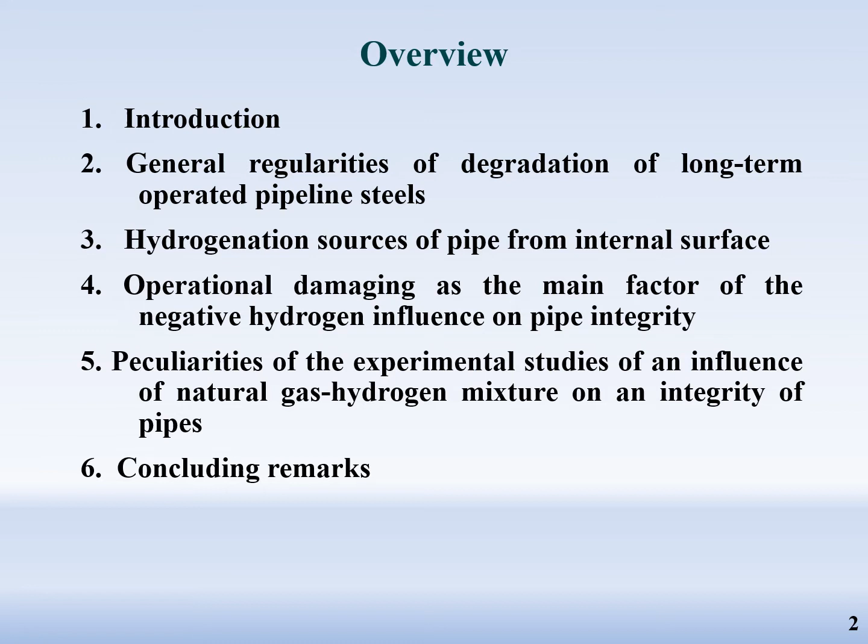Plan of the presentation: Introduction, general regularities of degradation of long-term operated pipeline steels, hydrogenation sources of pipe from internal surface, operational damaging as the main factor of the negative hydrogen influence on pipe integrity, peculiarities of the experimental studies of the influence of natural gas hydrogen mixture on an integrity of pipes, and concluding remarks.

Introduction. The new trend is now to use hydrogen as fuel in industry, and it causes some challenges in different aspects, namely hydrogen transportation. Hydrogen transportation is a cornerstone for setting up a hydrogen-based economy. Using the existing natural gas pipeline network for hydrogen transportation could be a way to match hydrogen economy needs and today's possibilities.

As you can see from this data, some hydrogen pipelines exist, such as networks owned by Air Liquide in the USA and Northern Europe. However, there are currently no large and widespread national hydrogen grids, and building them would require huge investments that can only be motivated by large hydrogen demand. So, supplying hydrogen by blending it with natural gas using existing natural gas infrastructure could be considered.

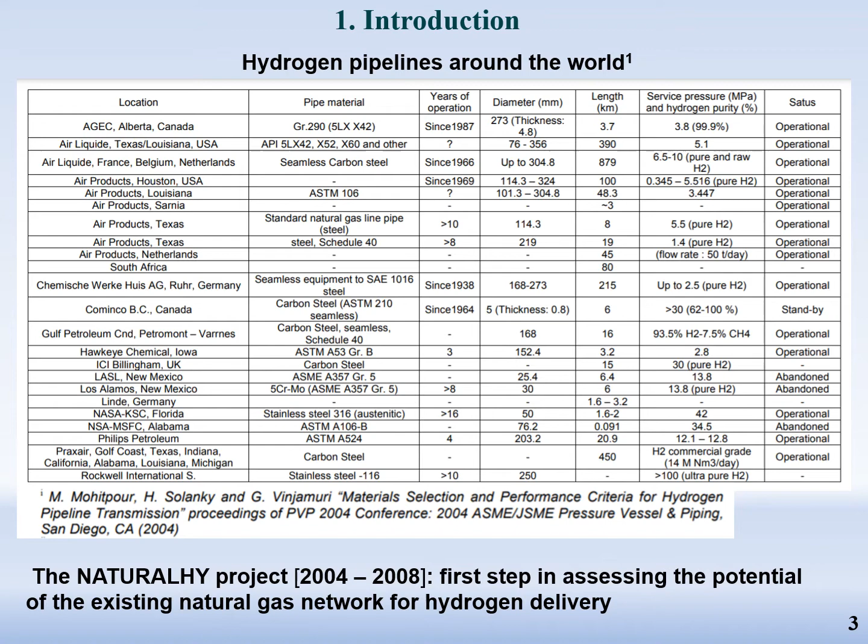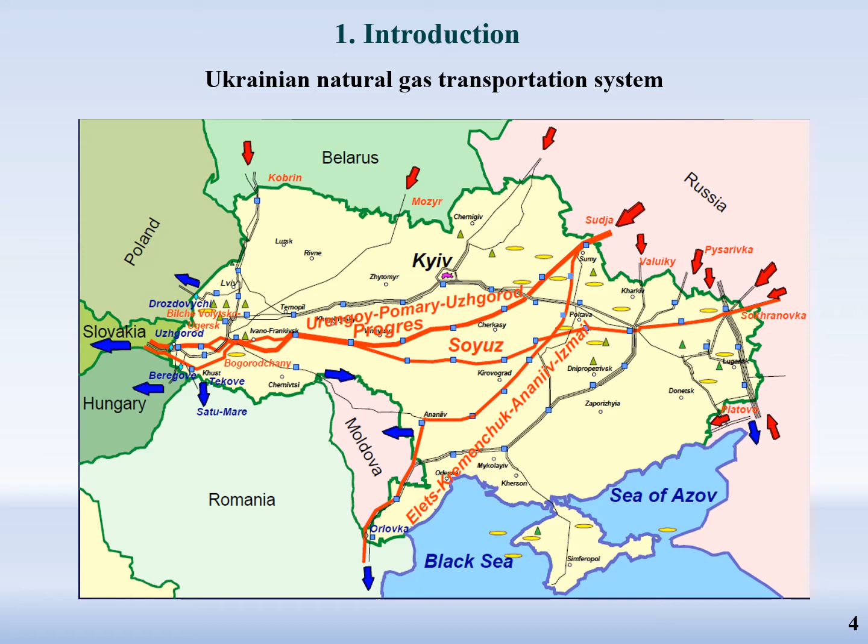The NaturalHy project is the first step in assessing the potential of the existing natural gas network for hydrogen delivery. Ukraine has an extended network of natural gas transit pipelines that could be used for supplying hydrogen as well. However, during long-term service, pipeline steels can degrade. A significant decrease of mechanical properties of operated steels, mostly brittle fracture resistance, can finally cause structure failure.

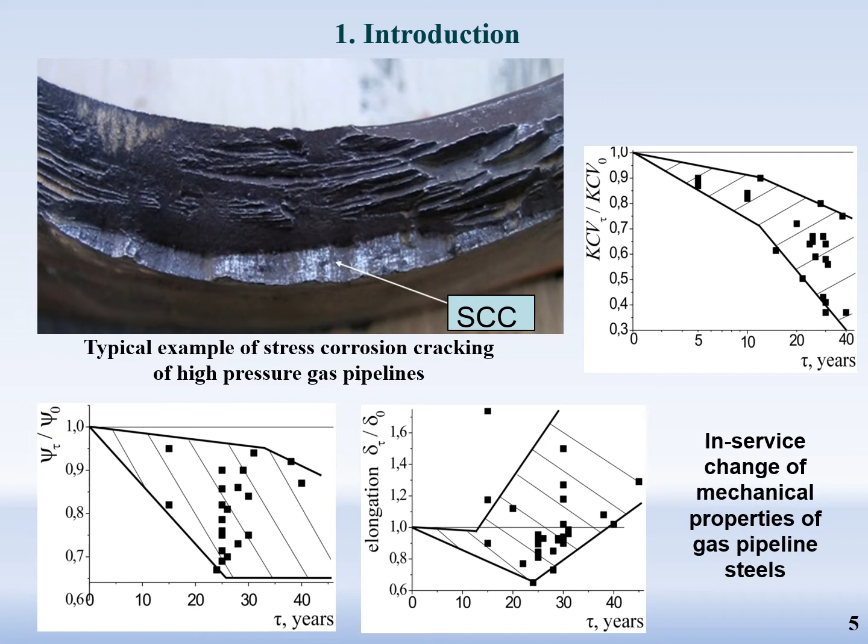Embrittlement. Deterioration of mechanical and corrosion properties is often the result of in-service degradation. Based on our previous results, we can distinguish two stages of in-service degradation of low carbon and low alloy structural steels. Stage 1, deformation aging, and stage 2, in-bulk material damage accumulation, or so-called dissipated damaging. It is well known that under strain aging, the strength and hardness increase, and plasticity and resistance to brittle fracture decrease.

However, this tendency of mechanical properties changes could be violated if the metal undergoes in-bulk multiple damaging during operation. In such circumstances, strength and hardness of the damaged materials decrease, but elongation increases. Further operation of the degraded steel leads to additional decrease in reduction in area and characteristics of brittle fracture resistance.

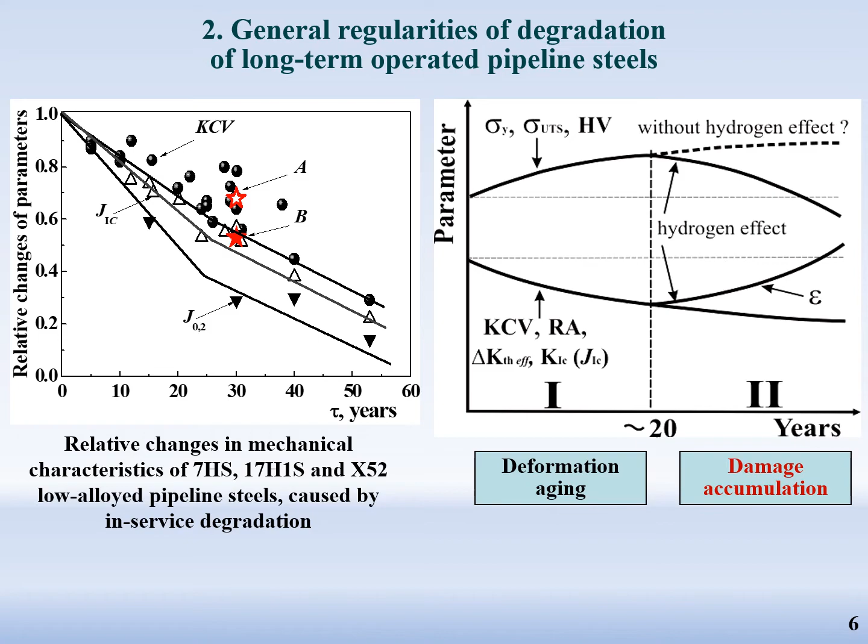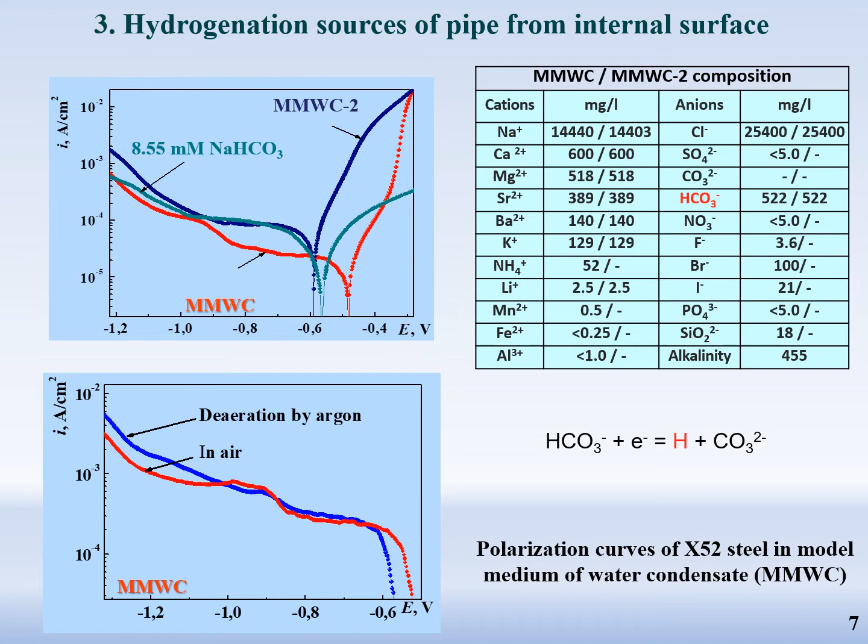Our preliminary study showed that the model medium of water condensate on the internal surface of gas pipelines has served as a source of hydrogen due to electrochemical corrosion. The same situation should be also in the case of gas-hydrogen mixture transportation. Then, hydrogen in atomic state, evolved as a result of electrochemical reaction and molecular hydrogen dissociation as well, can be absorbed by pipe metal in atomic state, which can migrate via the pipe wall.

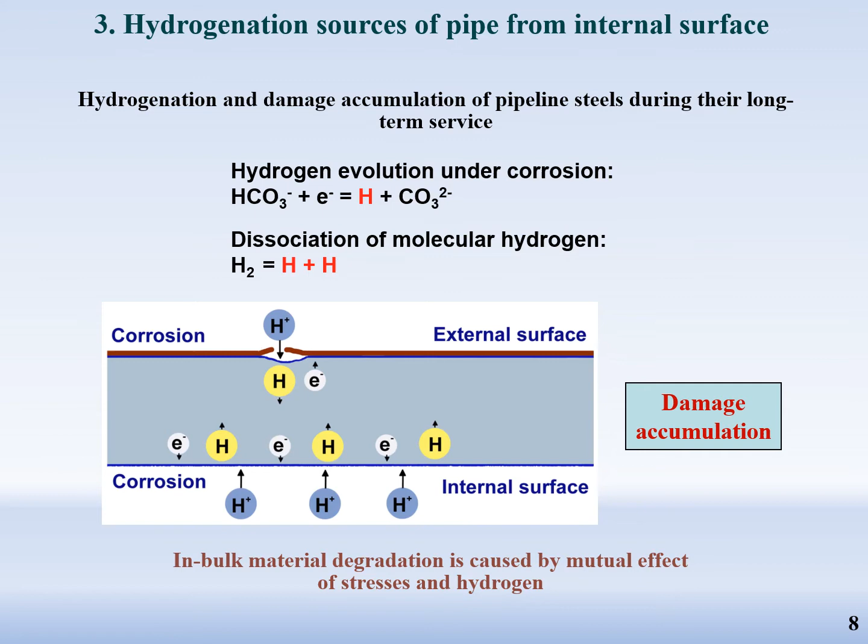On the other hand, operational damage serves as the main factor of the negative hydrogen influence on pipe integrity. Hydrogenation together with working stresses facilitates the development of in-bulk damages at nano and micro scales. It's often the main reason for degradation of brittle fracture resistance characteristics of materials under long-time operation.

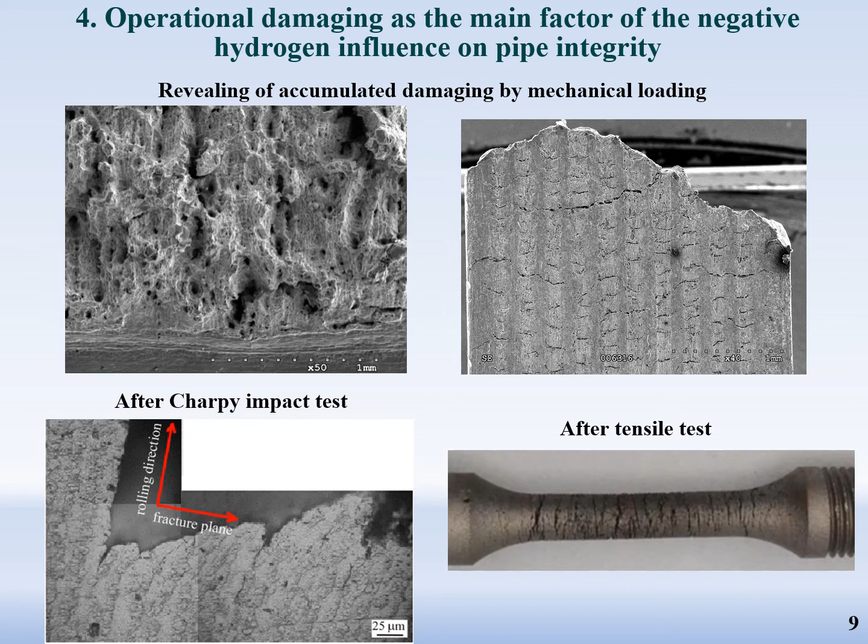So, regarding the peculiarities of the experimental studies of the influence of natural gas-hydrogen mixture on the integrity of pipes, we would like to draw the following. Firstly, to prefer transversal specimens as the most sensitive to hydrogen-induced cracking. And secondly, if we consider a possibility of metal hydrogenation, we should prefer thin specimens.

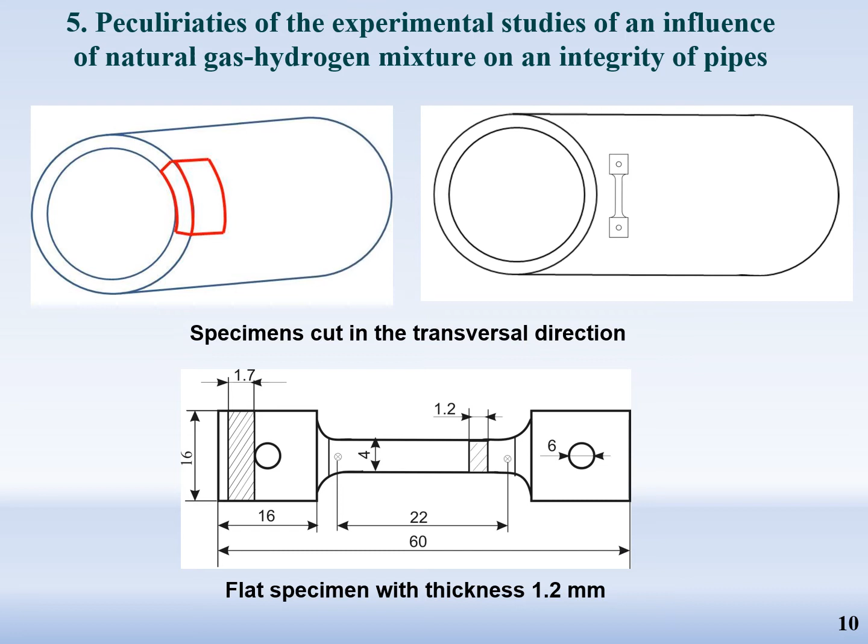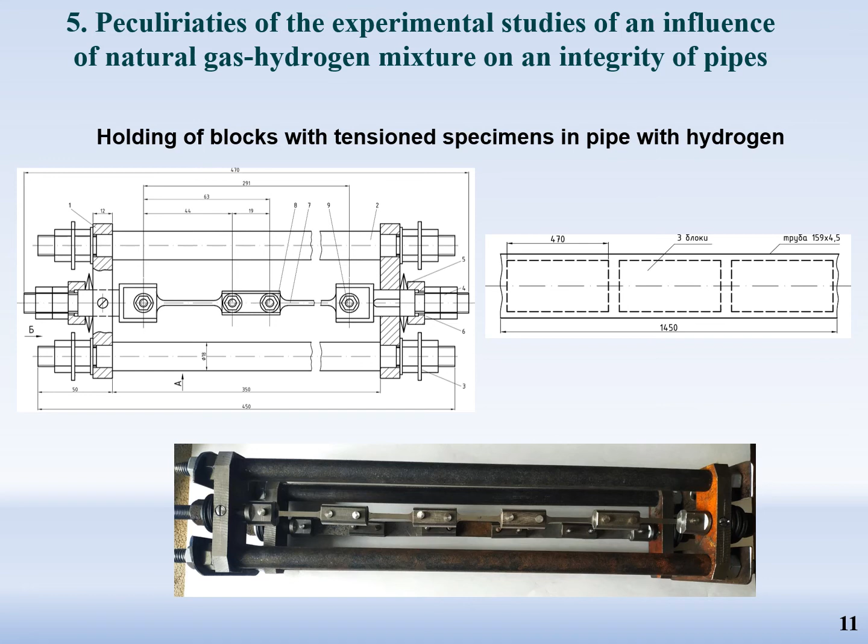We should also remember that hydrogen can leave a metal after taking specimens out of the pipe with gas-hydrogen mixture. So we plan to preserve specimens in liquid nitrogen before the next tests. Our program of tests predicts the most important studies, namely hydrogen-induced cracking tests, fracture toughness tests, the J-integral method, Charpy tests, hydrogen concentration measurements, electrochemical permeation methods for evaluation of hydrogen diffusivity in metals, and microfractography analysis for estimation of the influence of hydrogen on micromechanisms of steel fracture.

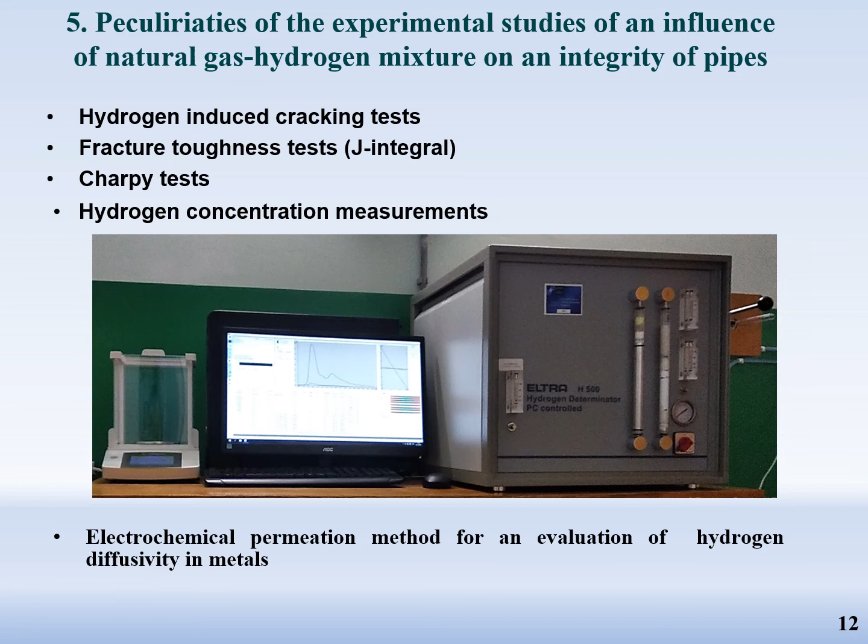The known method of hydrogen permeation should be especially useful in our case, since this method allows us to study some important parameters caused by holding of specimens in the pipe, a change in hydrogen trap intensity due to development of damaging, and a measure of so-called critical cathodic current density for pipeline steels. This parameter can serve as a parameter of sensitivity of steel to hydrogen cracking: the lower the critical current, the more sensitivity to hydrogen cracking.

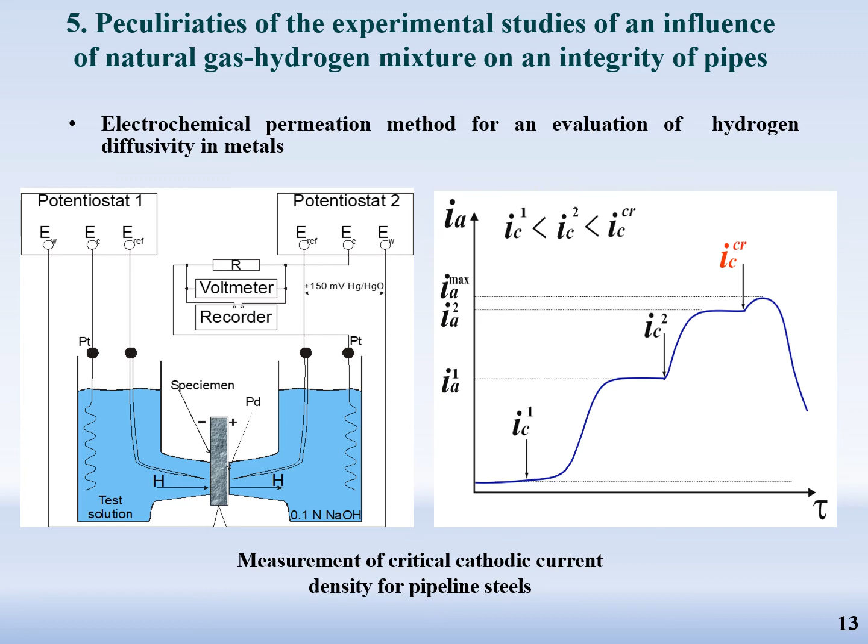And finally, some concluding remarks. Carrying hydrogen or its mixture with natural gas via steel pipelines can lead to hydrogenation of steel from the internal pipe surface due to both hydrogen dissociation and hydrogen evolution under electrochemical corrosion as a result of interaction with condensed moisture. Absorbed hydrogen can negatively affect steel by both hydrogen embrittlement and creation of hydrogen pressure in defects as a result of recombination, causing dissipated damage.

Operational degradation of pipe steel significantly decreases the characteristics of brittle fracture resistance, including hydrogen-induced cracking. In-bulk dissipated damaging is the main reason for the sensitivity of degraded steel to hydrogen embrittlement. And finally, the main peculiarities of experimental studies of the influence of hydrogen natural gas mixture on pipe steel durability.

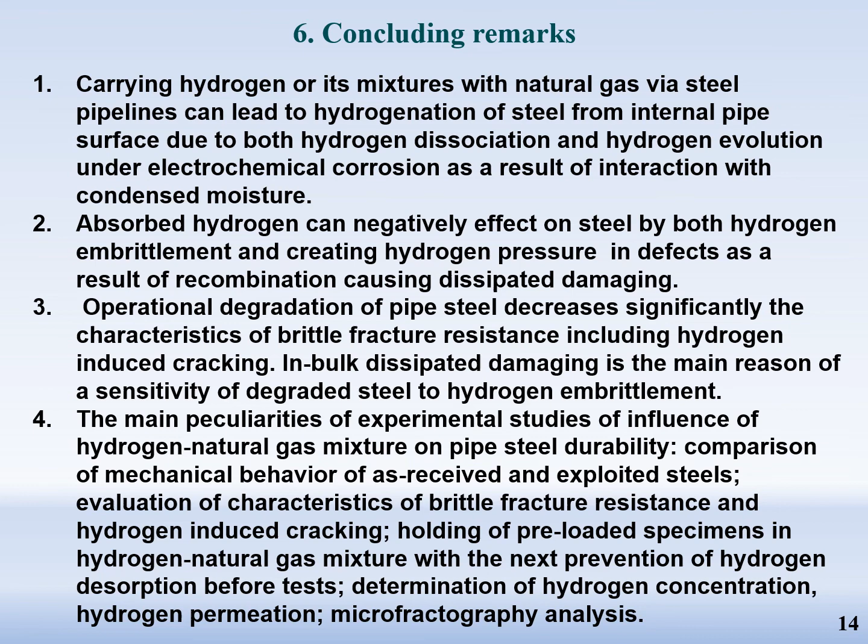Comparison of mechanical behavior of as-received and exploited steels. Evaluation of characteristics of brittle fracture resistance and hydrogen-induced cracking. Holding of preloaded specimens in hydrogen natural gas mixture with subsequent prevention of hydrogen desorption before tests. Determination of hydrogen concentration, hydrogen permeation, microfractography, and thank you for your attention.